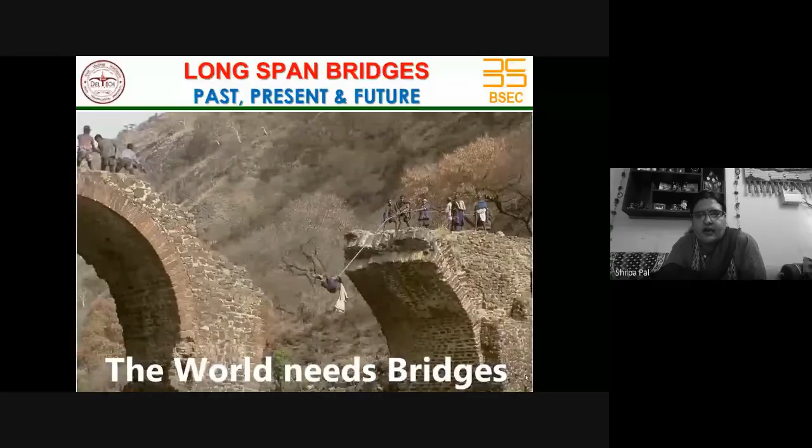So what I was mentioning is, bridges are amongst the most fascinating and at the same time the most challenging structural engineering work. And this is my profession as well as my passion.

A bridge, as I mentioned, is not just merely a crossing. They connect people, they connect communities, they reveal something about the creativity and ingenuity of the engineering fraternity.

If you see the early bridges, around the 13th century, we used to have bridges with non-metallic materials such as wire rope, vines, creepers, then stone and timber. The first suspension bridge, a long span bridge using cast iron chains, was built way back in 1620 in Tibet. The earliest version of cable bridges in modern times, using steel ropes, appeared about 150 years ago.

Bridges, as I mentioned, connect communities. What you see in this picture is basically school students crossing a stream by a bridge to reach the school. This is a reality in many parts of India and the world, and development stagnates if there is no bridge.

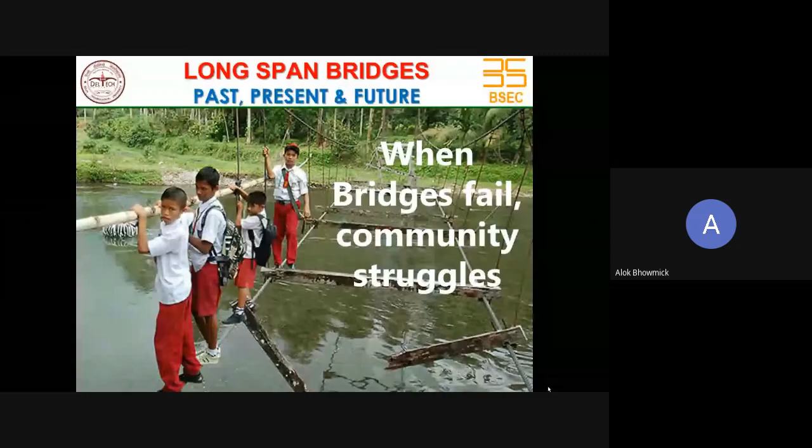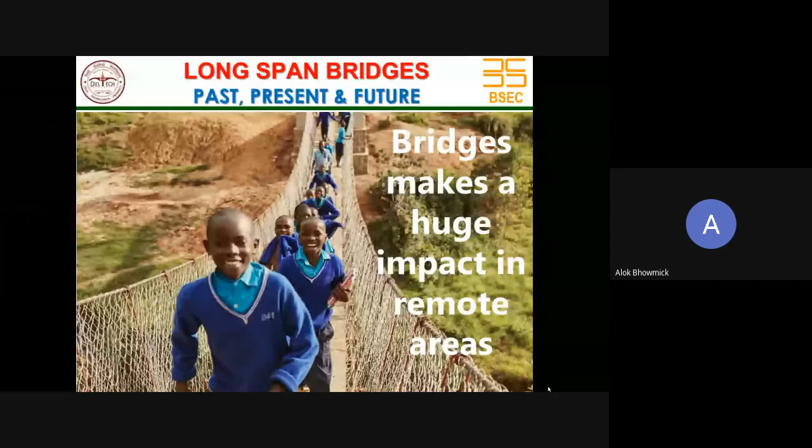What you see here is the smiling face of students crossing a bridge in Rwanda, called the Bridge to Prosperity. Interestingly, this bridge is built not by civil engineers but by the community itself, through community participation. Similar bridges are being built in remote areas, and they connect people and communities, becoming very much part and parcel of our human society.

Now, coming to my real presentation, which is on long span bridges: past, present, and future.

This is the broad content of my presentation. I will give a brief introduction followed by various types of long span bridges, along with the world record on span length. Then I will dwell upon cable supported bridges, which are the real long span bridges, followed by the conclusion. My presentation will last for about an hour, so kindly bear with me.

To start with the introduction, I will cover three important questions. First, what span length is considered long? When we talk about long span bridges, we must understand what is meant by long span, medium span, and short span. Second, what is so special about long span bridges, and why go for a long span bridge at all?

To answer the first question as to what span length is considered long, there is no clear-cut definition available. But broadly, based on the type of analysis we perform, we can say that short span is anywhere less than 100 meters. We would call it short span for the purpose of this presentation.

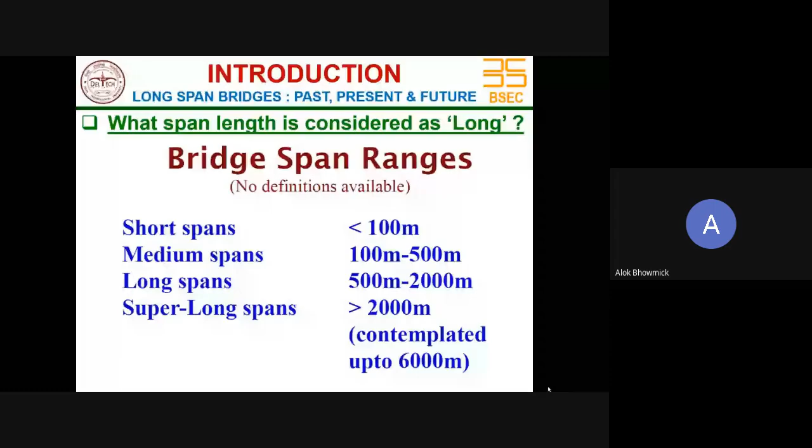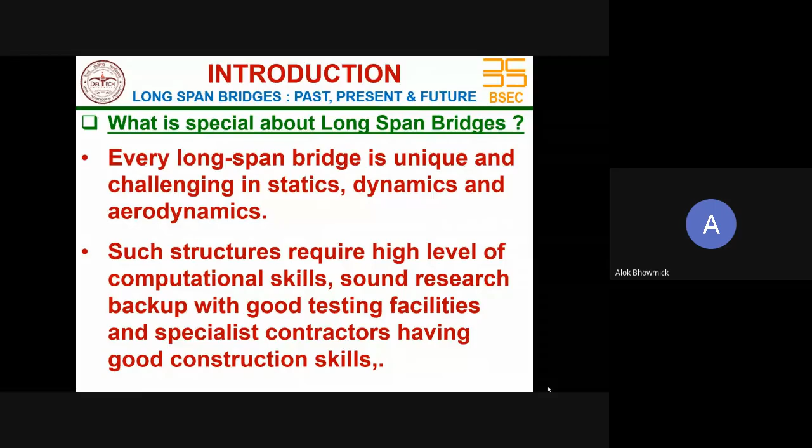What is special about long span bridges? Well, every long span bridge is unique and challenging in statics, in dynamics, and in aerodynamics. The treatment of each long span bridge would be different from the normal design philosophy and practice we follow for short and medium span bridges. Such structures require a very high level of computational skill, sound research backup with good testing facility, and specialist contractors having good construction skill to do this job.

Now the next question is why longer span? We require long span bridges at times to reduce the number of foundation units in a difficult area where foundation construction is difficult. As an example, we can have deep ravines or valleys, fast flowing rivers, hilly terrain where building foundations in deep gorges will be extremely difficult. Also, at times we require long spans in the stream for providing navigational clearances and to bring about greater overall economy and convenience.

As an example, if you can see, there is a hilly terrain and you can see these serpentine roads. Imagine a person staying on one side of the hill who wants to go to the other side for hospital or school. Imagine the kind of travel he has to do, even on a motor road - it would take hours to come down deep into the gorge and then go on top. So such a terrain would call for a bridge bridging the two hills, which would be a long span bridge.

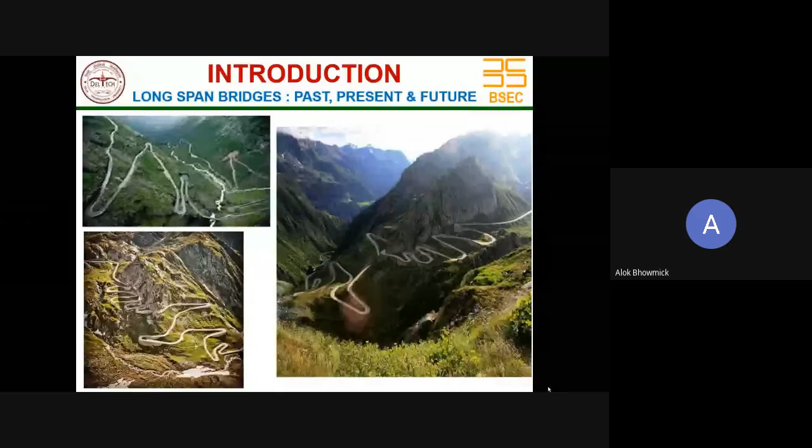An example of long span bridge connecting two hillocks, the slide at top shows Millau Viaduct, France, about 2.5 kilometer long, having multiple spans of 342 meter. This is a cable stayed bridge. As far as span length, it comes under medium as we defined, because anything less than 500 meter is medium. But this kind of long multiple span bridge would be covered under long span.

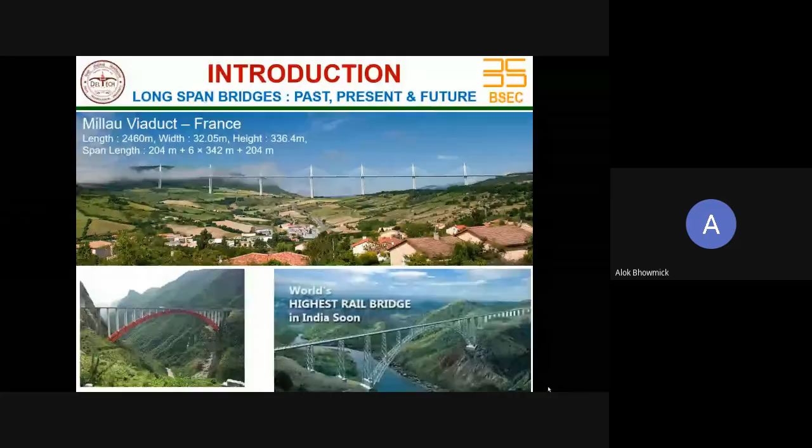There is no very clear cut definition of what is long span and short span, as I mentioned earlier. So this is one example where we have to connect two difficult terrains by means of a long span bridge. Another example, on the bottom right, is the world's highest rail bridge in India, which is under construction - a railway bridge in Jammu and Kashmir, spanning around 400 meter, coming very soon. It is under execution now.

What are the implications of using longer span? Well, there are many benefits and there are some disadvantages as well.

So if we go for longer span, we reduce the foundation construction, and in some situations this may lead to economy and feasibility. In many places it will be impossible to do foundations in the deep gorge, and therefore you have no option but to go for long spans.

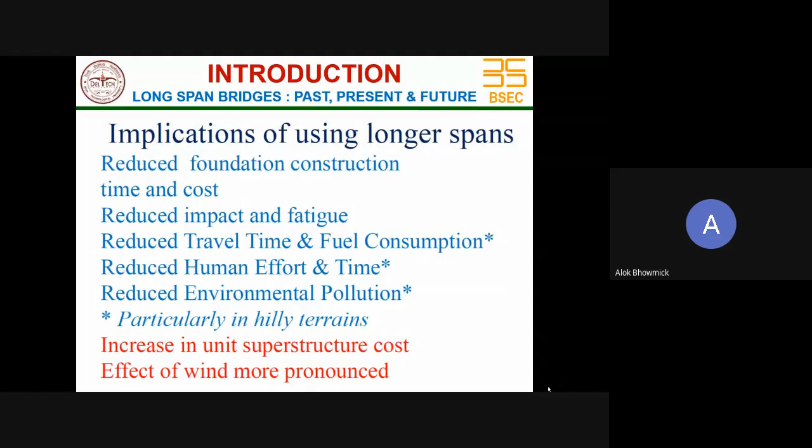Over the last 7 to 8 decades, India has made significant progress, and the world, of course, has also made significant progress in the art and science of long span bridges. I will explain in detail as we progress in the presentation as to where we stand in India as compared to the world in terms of span length.

Now, span length records are one of the indexes for measuring our advances or technological progress in bridges achieved over the years, and therefore it is important to do this. Although span length alone is not the only yardstick for measuring progress, we have made significant progress in many fields of bridge engineering, which may not be reflected truly if we simply compare the span length.

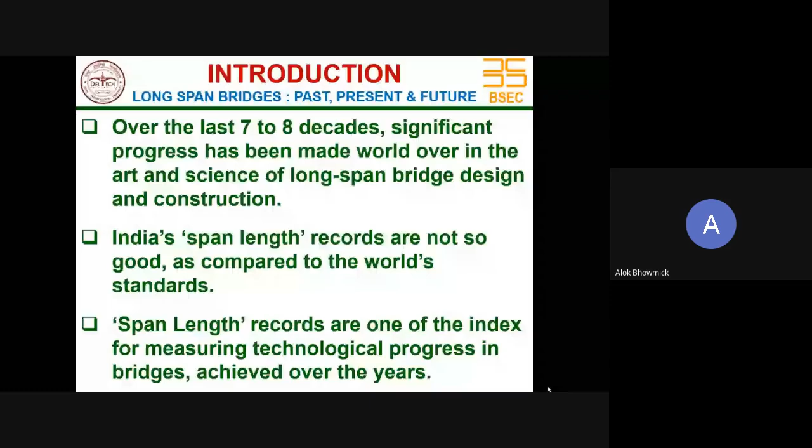Now, with this brief introduction, let me come to the second part of my presentation, which is types of long span bridges and record span length.

When it comes to long span bridges, we have the following categories: one is the girder bridge, second is the arch bridge, third is extradosed bridges, fourth cable stayed bridges, suspension bridges, and hybrid bridges. Let us understand what these stand for.

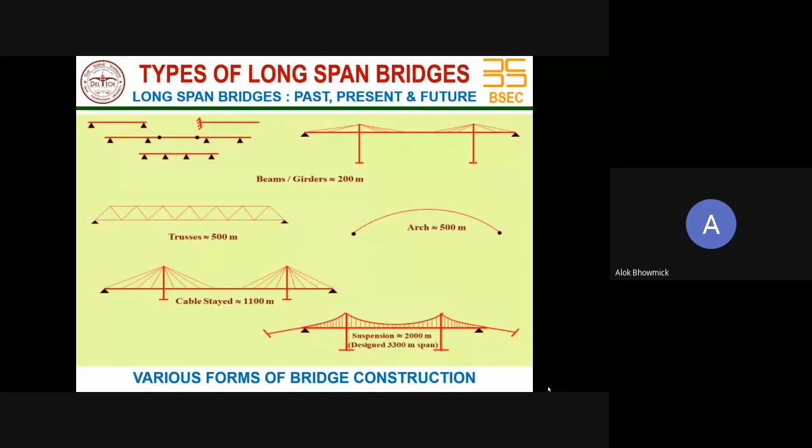So this is an example of girder bridges. You can see a number of examples just to show what girder bridges are. Many of you may not be aware of this, so I thought I would briefly tell you. You see these kinds of bridges routinely in urban areas or while crossing a river. These are girder bridges where the principal mode of transfer of load is through flexure, bending.

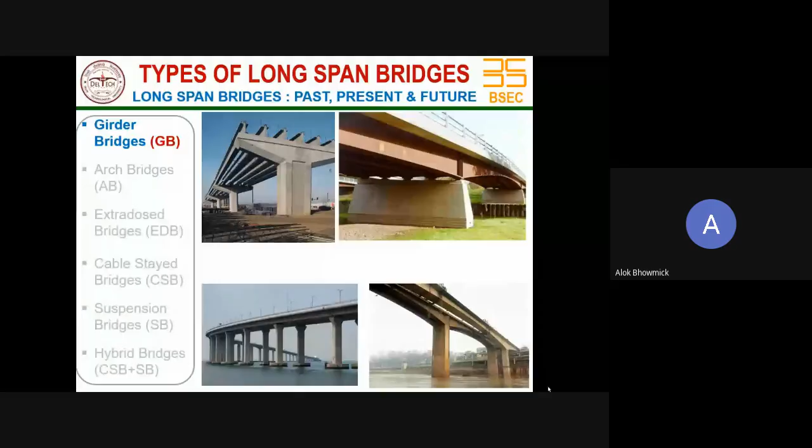The girder material in the case of the Shibanpo bridge, where the maximum span is 330 meters, is hybrid, and this is in China. One more interesting thing is that out of the top 10, 5 are in China. So China is dominating the girder bridges as far as technology is concerned.

So next is the arch bridges, and in the arch bridge category you can see various forms of arch bridges. I think in India we have a number of old arch bridges. I remember in Himachal Pradesh we have done 3 arch bridges in the Kulu and Manali area: Ramshila, Jia Barali, and they are in the span range of about 150 meters or so.

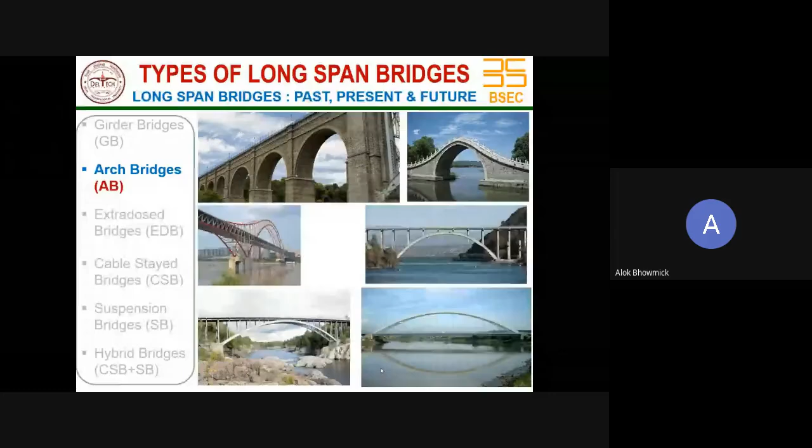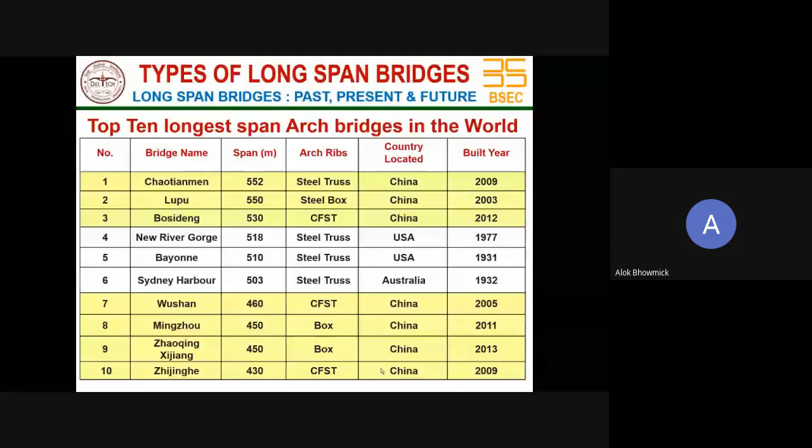If you see the list of the top 10 arch bridges in the world, the maximum span length is 552 meters, and in the top 10 the minimum is 430 meters. Again, in terms of arch bridges it is dominated by China, where 7 out of the top 10 bridges are basically in China. Material-wise, the longer the span, the trend is to go towards steel truss, or steel box, or concrete filled steel tubes. These are the 3 methodologies by which you can increase the span, reduce the dead load, and make it work.

In terms of extradosed bridges, what is an extradosed bridge and what is a cable stayed bridge, I think we will talk about a little later. But suffice it to say that extradosed bridges are also cable supported bridges, where the mode of load transfer is partly through flexure and partly through tension through cables. So it is a mixture, bridging between a girder bridge and a cable stayed bridge. In a cable stayed bridge, the principal mode of load transfer is through cables, which is tension. In extradosed bridges it is intermediate: the girder has rigidity, so part of the load is transferred through flexure of the girder, and part through the cables by tension.

India has done exceedingly well in extradosed bridges in recent times. In the last 2 years, India has, by the way, the longest bridge length of extradosed bridges in the world, in Bihar, and we are matching the world in terms of quality, span length, and technology as far as extradosed bridges are concerned.

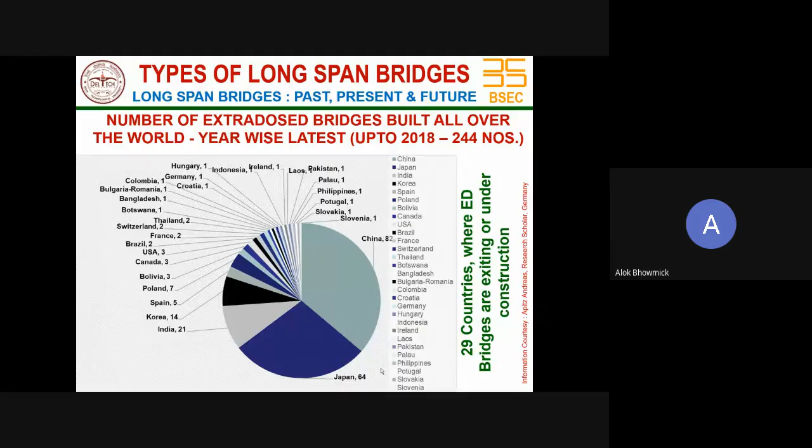Till last year, up to 2018, I had information that about 250 bridges, precisely 244 in 2018, had been constructed. Now more than 250 bridges all over the world have been constructed. These extradosed forms of bridges are relatively of recent origin, unlike suspension bridges, arch bridges, and cable stayed bridges, which have been in practice for more than 2 centuries.

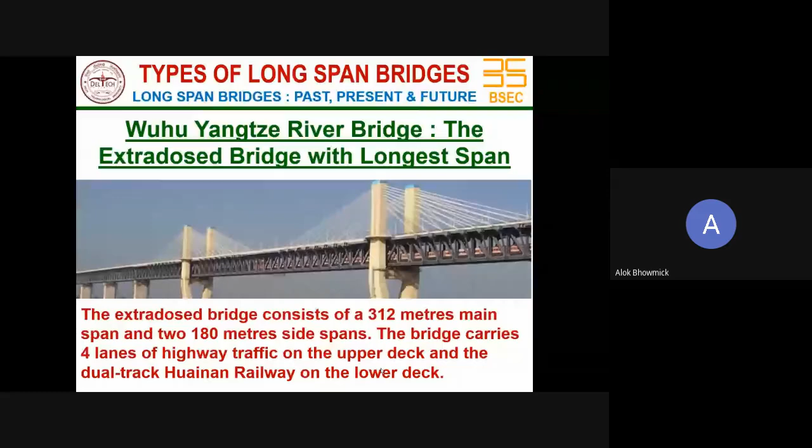The principal mode of load transfer is tension through the cable. You can see that the deck is so flexible and thin that it doesn't have any carrying capacity of the load. Whatever load comes from the live load gets transferred to the cable, and the cable transfers it to the pylon, and from the pylon it goes to the foundation. That's the mechanism.

This is a bridge I want to spend a little time about. It is one of the most pleasing cable supported bridges which was conceived but never constructed. This bridge was designed by T.Y. Lin to cross the middle fork of the American River, about 10 miles upstream of the planned dam. There was a design competition, and T.Y. Lin won it for the best design.

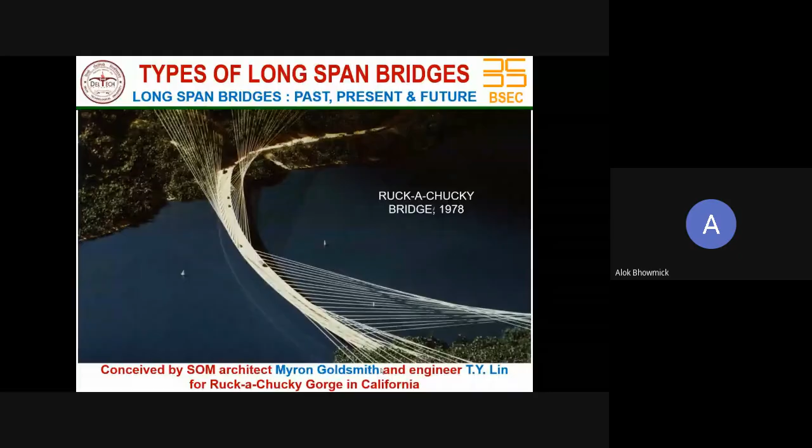If I look at the 10 longest span cable stayed bridges in the world, as mentioned, Russky Bridge at 1104 meters is the maximum span, and most of these bridges are in China—6 out of these 10 are in China. Another thing is that as the span goes longer and longer, the deck becomes orthotropic steel, OSD meaning orthotropic steel deck. As the span gets longer, you have to reduce the dead load, so slowly you convert from concrete to steel as you increase the span. So most long span bridges have a steel deck, and most steel is optimally used in long span bridges.

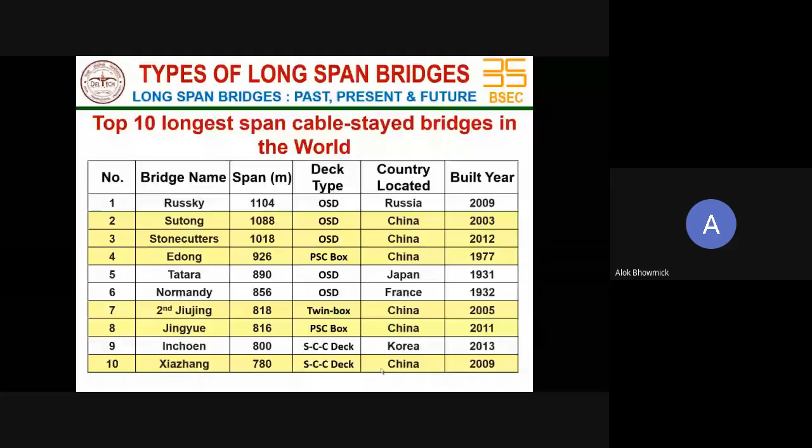Coming to the suspension bridges category, we have the Akashi Kaikyo Bridge in Japan, about 2 kilometers long. Suspension bridges and cable stayed bridges are those where the spans can be increased further. Presently we are at 1100 meters for cable stayed bridges and 2 kilometers for suspension bridges. But very soon, in another 5 years, you will see bridges with span length more than 3.3 kilometers long, coming up in Italy.

If we look at the top 10 longest span suspension bridges, Akashi Kaikyo is on top at 1991 meters, which is nearly 2 kilometers, and it's a trussed bridge with a truss type deck. Again here you see China's dominance on suspension bridges. So in a nutshell, when it comes to long span bridges, China has dominated in all forms. I think credit goes to their very strong research units and also their construction—they have developed widely in construction technology as well. Over the last 10-20 years, this development has taken place there.

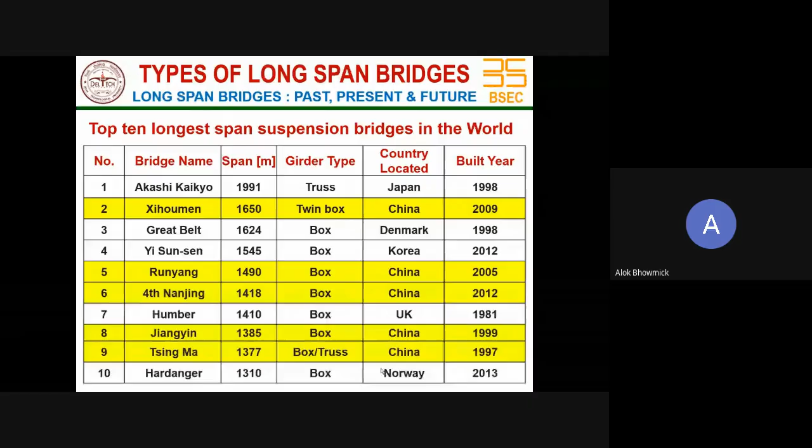Now coming to hybrid bridges—what are hybrid bridges? A hybrid bridge is a combination of cable stayed and suspension bridges, meaning you have cables in the shape of a cable stayed bridge as well as the shape of a suspension bridge. A fine example of a hybrid bridge is the Brooklyn Bridge, constructed way back in 1883 in New York, an iconic bridge you can't miss if you visit as a tourist. The one of recent origin is the Yavuz Sultan Selim Bridge, popularly known as the Third Bosphorus Bridge in Turkey, about 1.4 kilometers long, and it is a hybrid form.

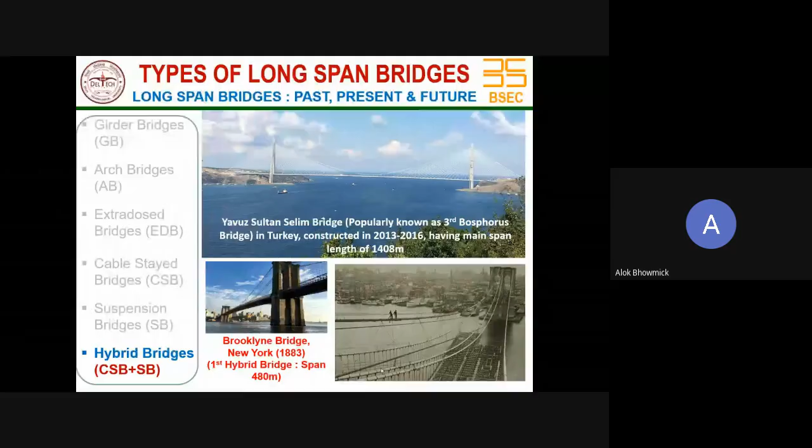So with this brief about the various types of long span bridges, we come to the next part of our presentation, which is cable supported bridges, development and prospects in India.

We discussed about, we have seen this slide earlier, and in this we have discussed about all forms of long span bridges, but now let us focus more on these three systems, which is cable supported bridges, that is cable stayed, suspension and the extradosed bridges.

In fact, out of these, let me focus only on the cable stayed bridge and the suspension bridges, because extradosed bridge also has a limitation. It can be built only up to about 300 meters, that is an extreme limit which China has succeeded in. But otherwise, generally, it will become economical for an extradosed form only when the spans are maximum up to 250 meters or so. Beyond 250 meters, you have no option but to go for either a cable stayed bridge or a suspension bridge, or you can go for arch bridges, steel arch bridges, which I have shown.

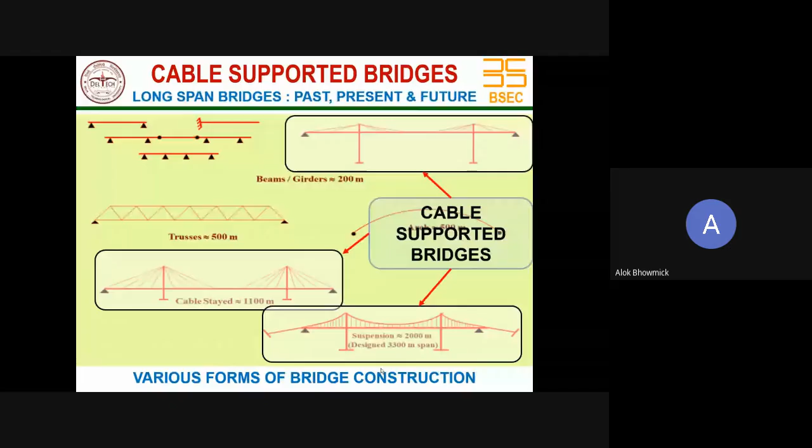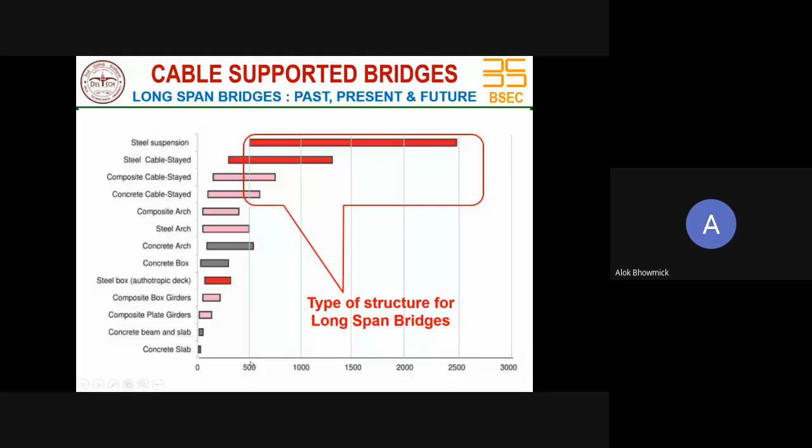So if you see this slide, it tells you in the long span bridge category, what is the bridge form which is most suitable. And you can see that beyond 500 meter, you only have the steel suspension bridges or steel cable stayed bridge or composite cable stayed bridge and concrete cable stayed bridge. In all other categories of type of bridges, they are suitable below 500 meters, and between 300 to 500, of course, there are many forms which are possible.

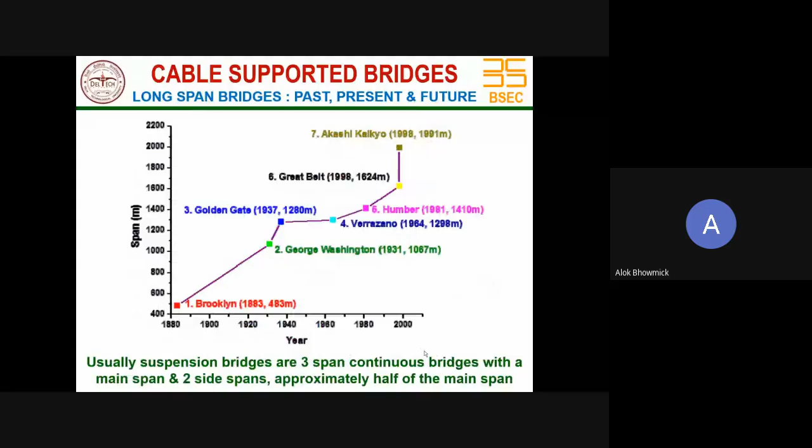Similarly, in terms of cable stayed bridges, suspension bridges, this is how we progressed. Brooklyn Bridge was constructed in 1883, 483 meter span, but today we are at 1991 Akashi Kaikyo, and Messina Strait will be somewhere 3,300 meters, which will be way above, when it is completed, of course.

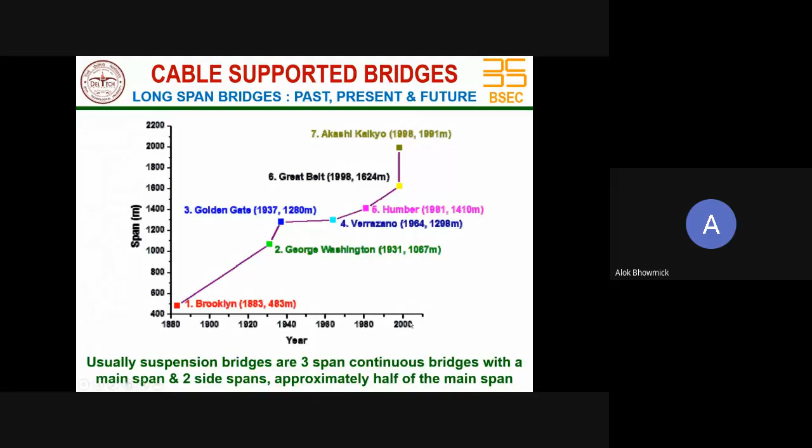In the case of a cable stayed bridge, the structural behavior is different, where the deck is supported by a series of cables connected to a pylon, and then the deck is suspended by these cables. Each and every cable is a primary member. There is no secondary element here.

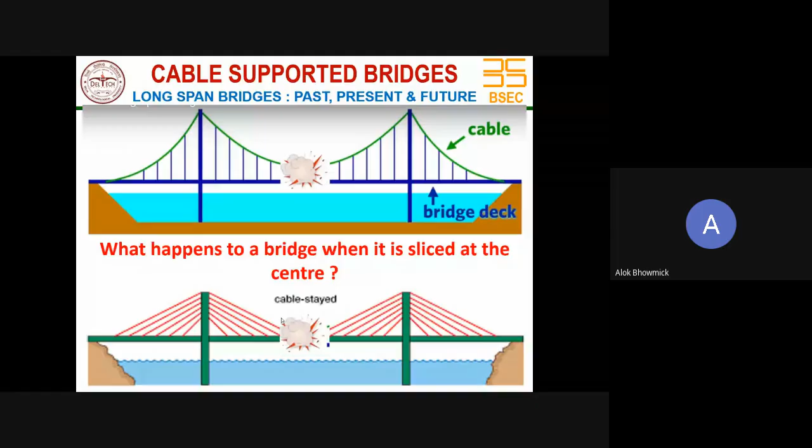Just to give you a better understanding, if you blow up the suspension bridge at the middle, if this cable is cut, if a terrorist wants to destroy a bridge, he has to cut this one cable, that's good enough, because that would result in the failure of the bridge. But in a cable stayed bridge, breaking one cable would not lead to a global failure, because the bridges of this form are nowadays generally designed for a situation where one cable can get snapped. So just breaking one cable will not mean a complete failure of the bridge.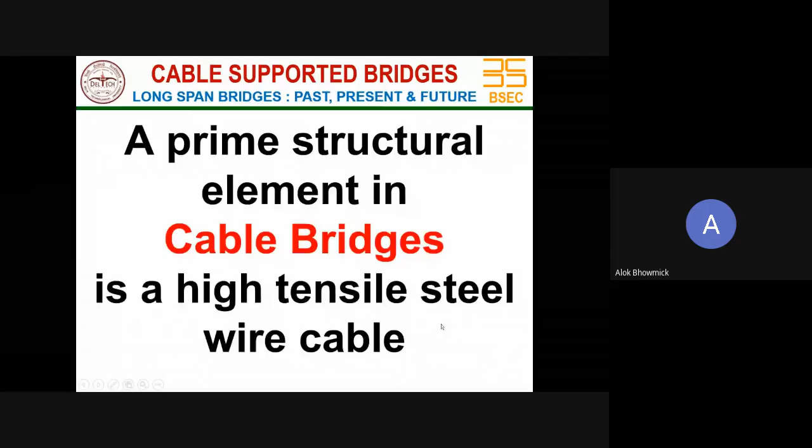So now let us understand that in any cable supported bridge, the prime structural element is the high tensile steel wire cable. These are the various forms of cross section of the cable, whether it is a cable stayed bridge or a suspension bridge. These are the primary element, and the entire technology revolves around how to reduce the dead weight of this primary tension element and how to maximize the unit force on this cable.

We can see now how we have progressed over the years on the cable technology. Just to give you an actual picture of the various types of cables that we use: this is called parallel wire cable, which is used in Golden Gate Bridge. We have parallel strand cables, steel wire ropes, locked coil strands. All these are different forms which are used, and they have their own applications.

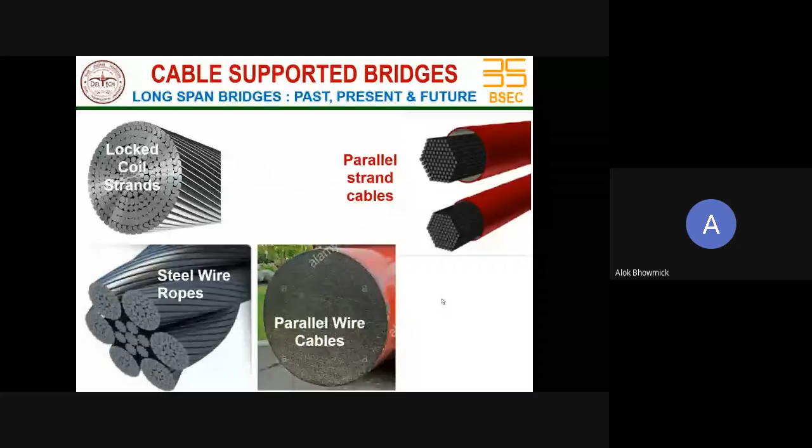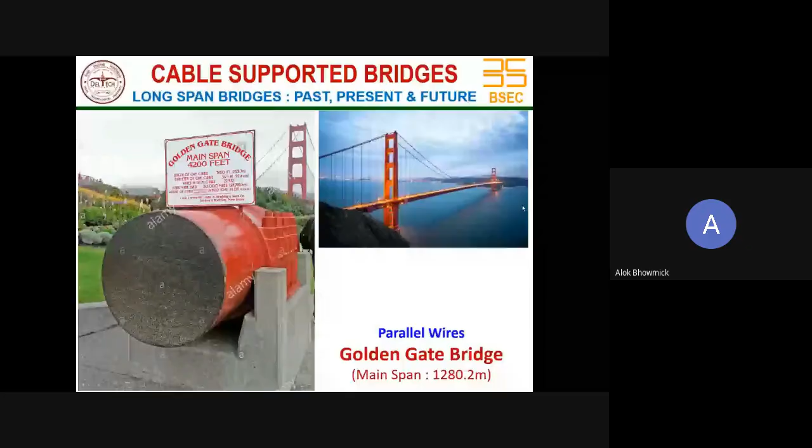I would not like to go into details of those applications in this presentation, because we will lose focus. If any of you have visited California, San Francisco, and visited the Golden Gate Bridge, there is a museum on the side where you can see a picture of a section of this cable. This is a parallel wire span. The main span is about 1280 meters, and this shows the cross section of the cable.

How have cable bridges evolved from the primitive days? Let us understand this. In primitive times, we have what you call living root bridges. They still exist in Meghalaya, and this is the primitive cable supported bridge where tree roots are being used to connect. Very interestingly, these bridges still exist in Meghalaya today.

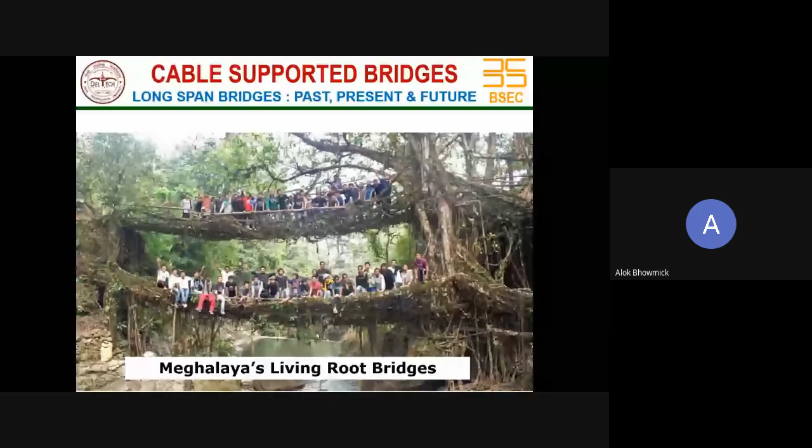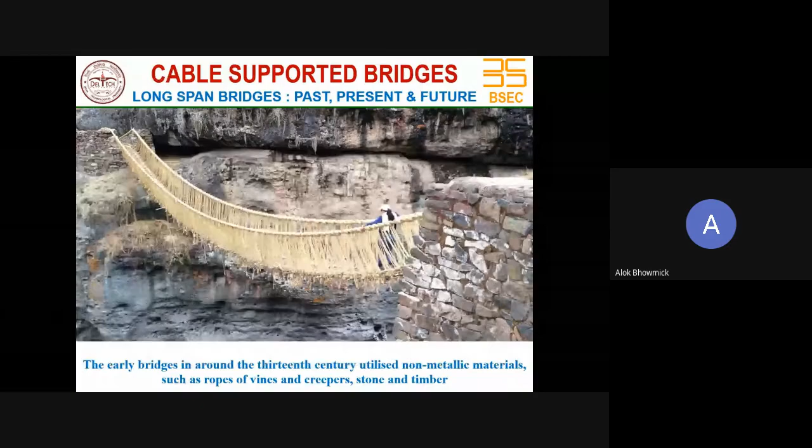Another example of Meghalaya's living root bridges. The early bridges around the 13th century utilized, as I mentioned earlier, non-metallic material like ropes of vines, creepers, stones, and timbers.

Why do you go for cables in terms of long span bridges? I mentioned this earlier; let me explain in little greater detail. These tension structures are essentially utilized in longer spans where other systems would not compete, as I mentioned.

It may be noted that in a flexural system, you have this stress strain curve. The capacity of the section is derived by its capacity to follow this stress strain. You have compression - if it is a simply supported structure, you will have compression at top, tension at bottom, and whether you go for reinforced concrete, pre-stressed concrete, or steel, you have to ensure stresses are within limits. In this scenario, stresses are maximum only at the extreme fiber, and we are not utilizing the material to its full capacity, because the strain and stresses reduce from the extreme fiber. So there is a limitation in optimum utilization when you talk about beam flexure.

Now take the case of a cable. The cable is in tension, and you can see at any cross section, whenever there is a transverse load, the cable is fully stressed. All the fibers have the same uniform stress, and therefore, if it has the capacity, it can take the load optimally.

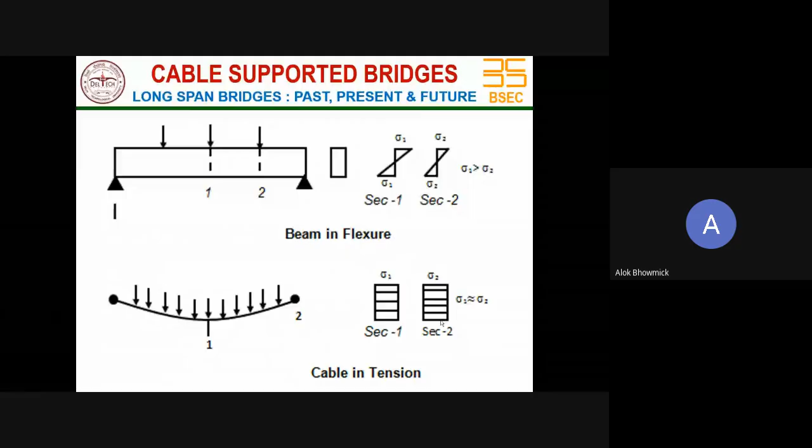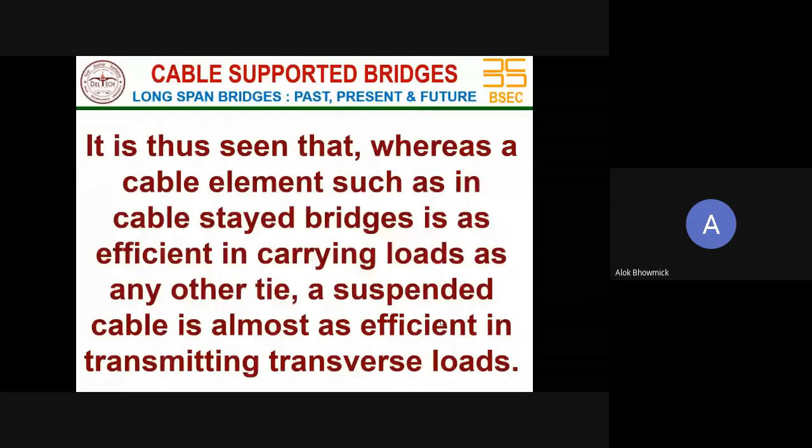A cable element in a cable stayed bridge is as efficient in carrying loads as any other tie. A suspended cable is almost as efficient in transmitting transverse load also - I will discuss this in a little detail now. Furthermore, a cable element, being a purely tension member, is more efficient than a comparable compression element such as an arch, which is encumbered with possible instabilities.

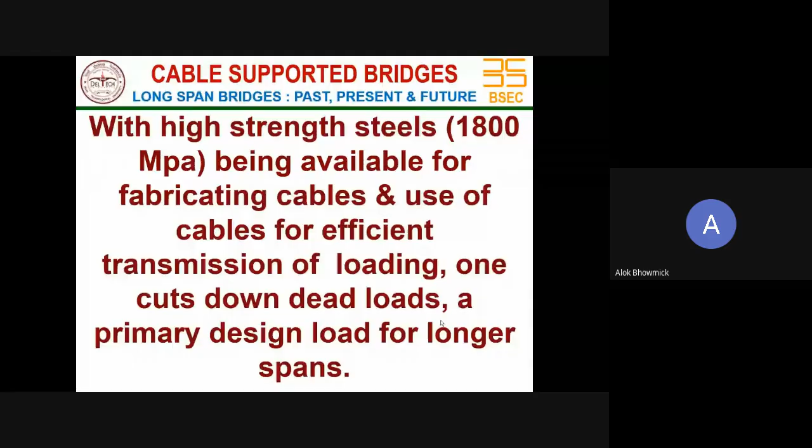So therefore, one of the prime reasons we can increase span lengths beyond what we have achieved is by increasing the strength of steel, or unit stress in the cable, because in a long span bridge, the primary load is the dead load. Live load is only a small fraction of the total load. So if we want to optimize, we have to reduce the dead load, and one way of reducing the dead load is by increasing its strength.

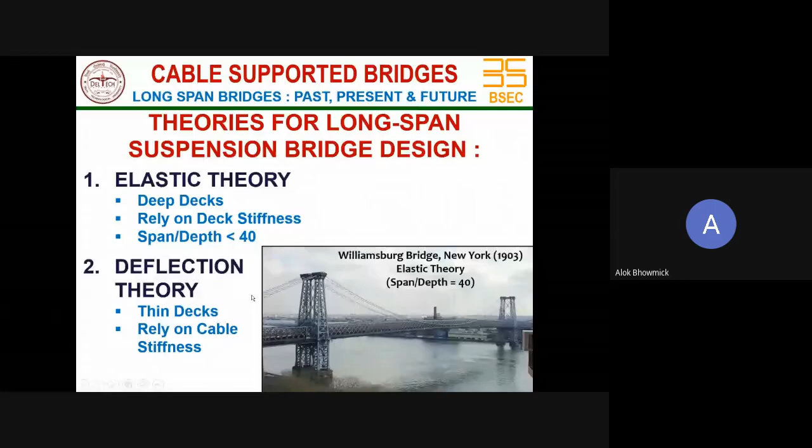In hindsight, one could say that the bridges went overboard - the designer went overboard in providing the stiffness of the girders, while additionally using cable stays also. So a lot of margins because of uncertainties.

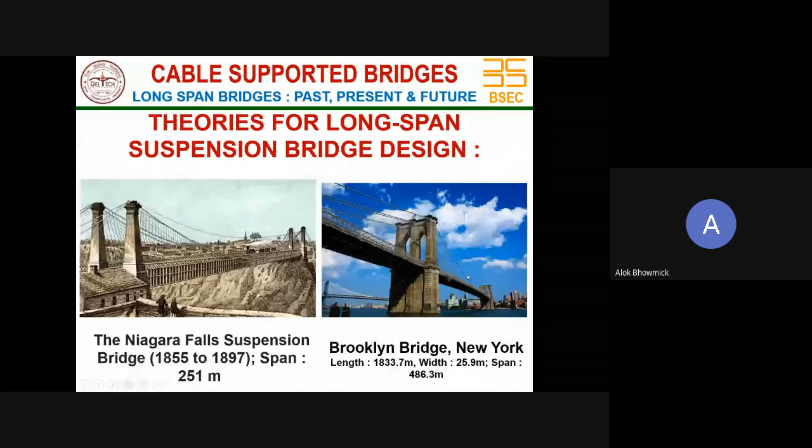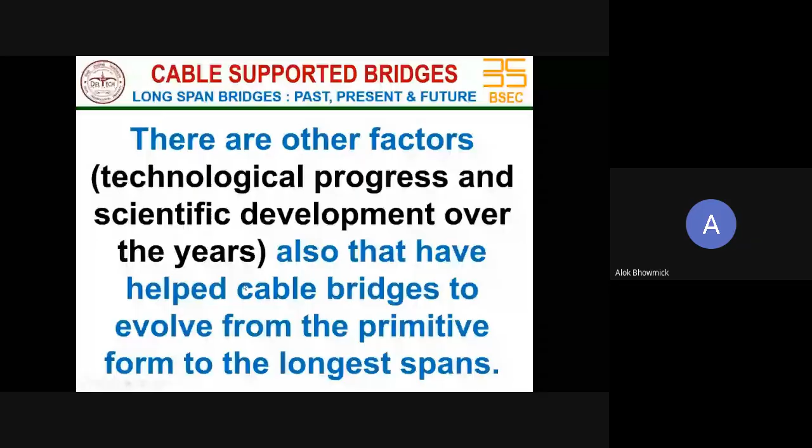This bridge collapsed in 1940, and I don't know whether I'd like to show you a small video. Let me see. Okay, I think the video is not working. Let me try again. Yeah, so let me show a video of this.

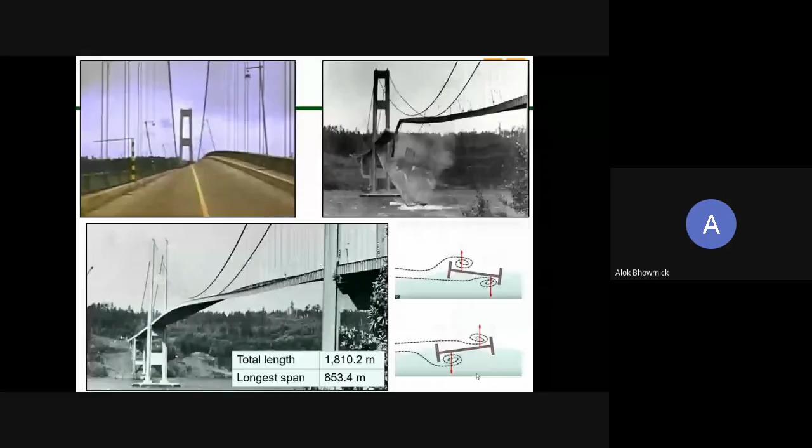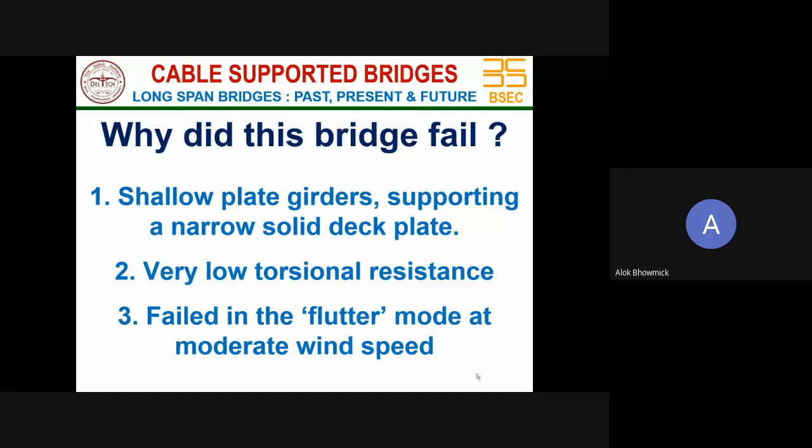This collapse of the Tacoma Bridge enlightened all civil engineers designing suspension and cable supported bridges in that period, leading to many lessons. Subsequently many theories on wind behavior of long span bridges were decided on the basis of this collapse. Why did this bridge fail? It failed because of shallow plate girders supporting a narrow solid deck plate, very low torsional resistance, and it failed in the flutter mode at moderate wind speed - mainly due to the lack of understanding of wind load.

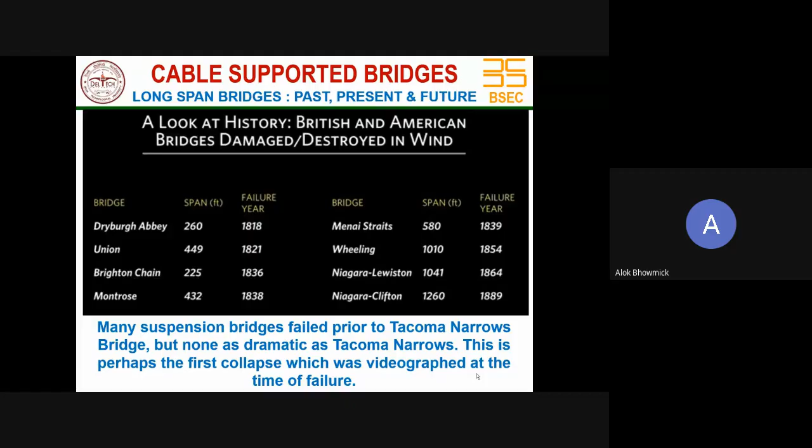A far better understanding of bridge aerodynamics followed the efforts after the dramatic Tacoma Narrows Bridge disaster - instead of using plate girders, engineers began using box or split box girders, and surface features for long cable stayed bridges. These are the lessons learned. Incidentally, there were many failures before Tacoma Narrows and many afterwards also, but nothing was as dramatic, because this collapse was actually captured on video, leading to very good understanding of the behavior.

These are some of the concerns of wind behavior: flutter, vortex shedding, and buffeting. All these things were studied deeply later, and we extended the span lengths. In fact, subsequent to the Tacoma Narrows Bridge collapse, many of the suspension bridges existing at that time were strengthened because of the better understanding of wind.

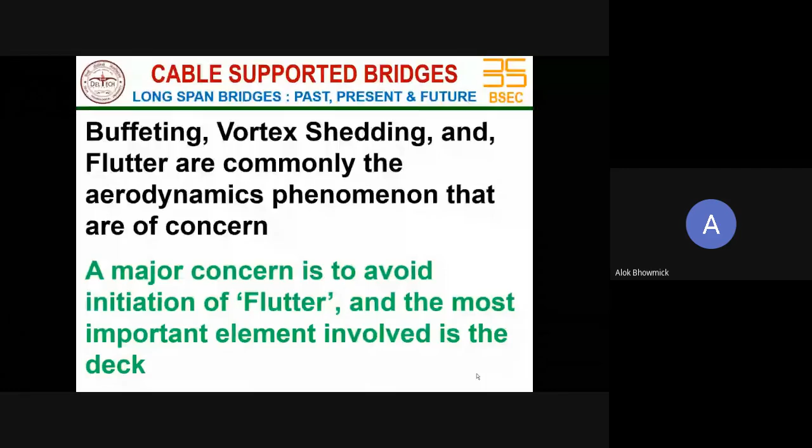Now let us come to the individual elements of the cable supported bridges and understand the behavior. The deck is the most important component of the bridge from the standpoint of aerodynamic behavior. You can see that the shape of the deck cross section can have a profound impact.

The trusses, as you see on the top slide, this is a truss bridge and this is a box. These are the two types. Modern suspension bridges are all with box because the aerodynamic behavior is far better. The earlier ones are made of trusses, and there is a significant difference in the behavior on wind. The truss attracts large drag compared to the streamlined boxes.

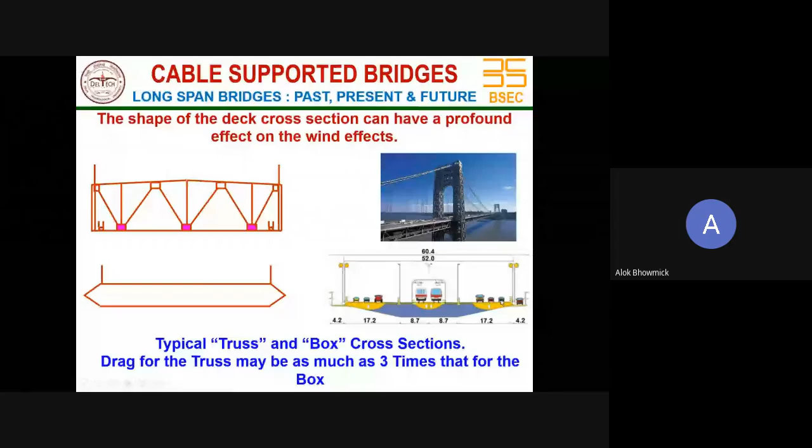The cross section here you can see is that of the Messina Bridge in Italy, which is under construction. You can see the drag coefficient for different shapes.

Let me tell you that when the span length is increasing, as we go for longer spans, all other loads are secondary. The wind becomes the dominating force. General conception amongst engineers is that earthquake is a very dominating force for long spans or tall buildings. It is not so. Earthquake takes a second position. Wind becomes dominating, and a better understanding of wind, good wind tunnel testing, becomes necessary when the span length increases. You can see how the shape of the elements are so important while fixing the long span so that you can reduce the wind forces.

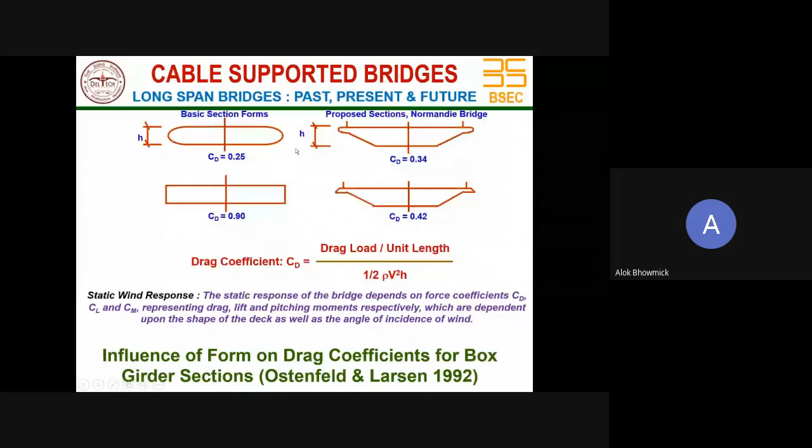So this split box is what you see here, the cross section of Messina Bridge, and a single box is not good from wind consideration. So it is a split box. There are 3 boxes with a transversal beam, and this is the form.

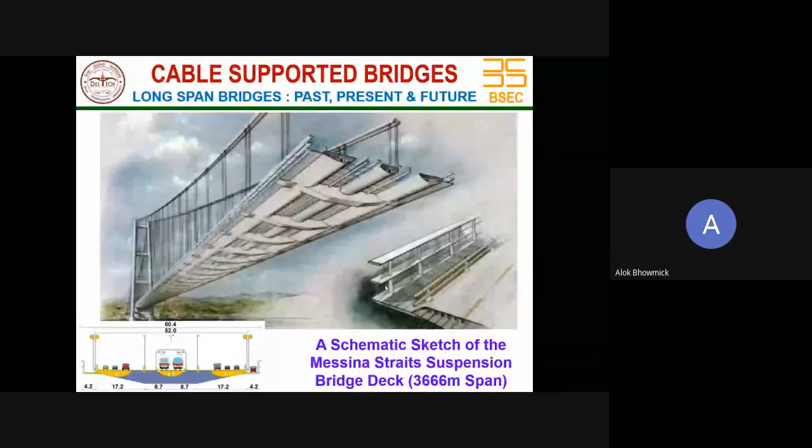I can show you another isometric view of this bridge, a schematic sketch of Messina Straits. The main span length is 3,666 meters, and you can see not only the deck has got streamlined aerodynamic features, even the railings are having aerodynamic features. This is the level of detail that you have to go to if you go for a cable stayed bridge or suspension bridges of long spans.

Let us come to the cables. Cables are employed in suspension bridges as main cable and hangers, and in cable stayed bridges as stays. As I mentioned earlier, in case of suspension bridges, this is the main cable and this is the secondary cable, the hangers. In a long span, they often experience singing due to vibrations.

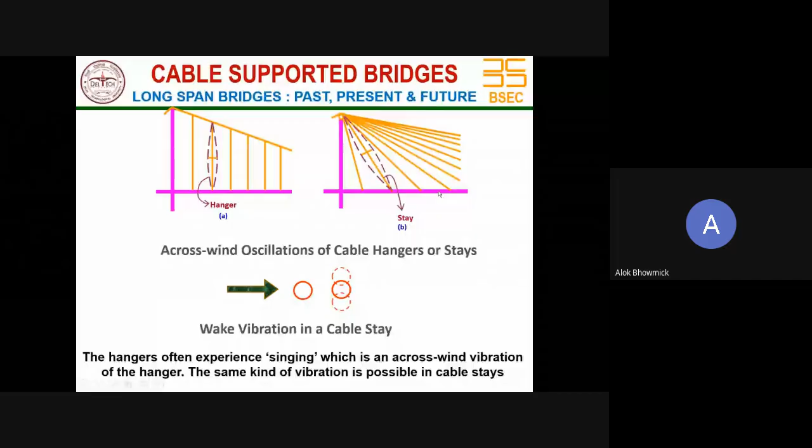Even in case of cable stayed bridges, there is sometimes singing of the cables in very long spans, where this cable itself may be about 300 to 400 meters in length. There are ways and means by which these vibrations can be controlled. As stays become longer, the problem of rain-wind induced vibration becomes a possibility.

Hangers and stays may often be provided in pairs. In such cases, wake induced across-wind oscillations may also occur. So what are the various ways by which you can reduce that?

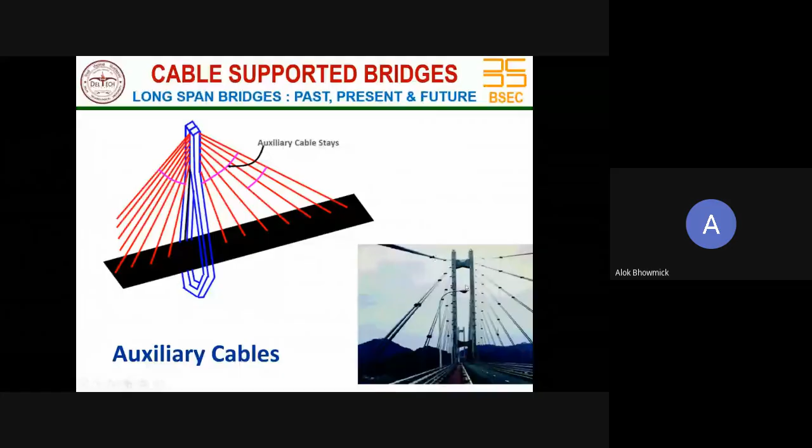You can provide auxiliary cables. You can see how these auxiliary cables are placed to reduce the vibration. You can also use damping devices. You can see how the damping devices are placed here to increase the damping of the cable vibration.

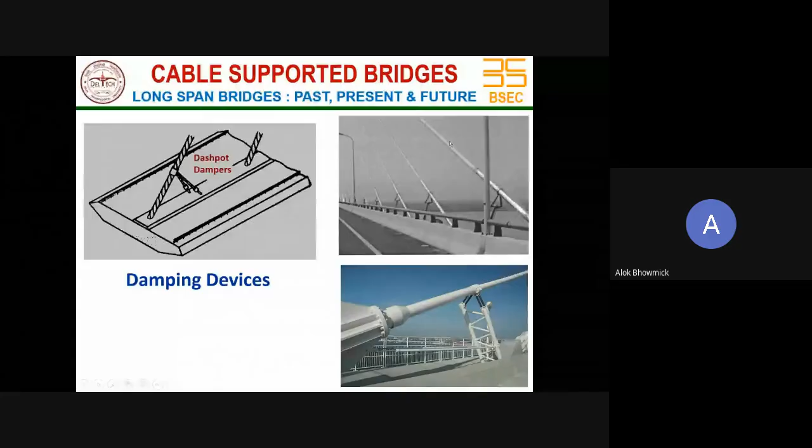Also, you can have possible surface features in the stay cables to reduce the rain-induced vibrations and the wind-induced vibrations. There are several ways by which it can be done, and there is a lot of research going on. In practice, these are live examples from the bridge. You can see these dampers are placed in the cable to reduce the vibration impact.

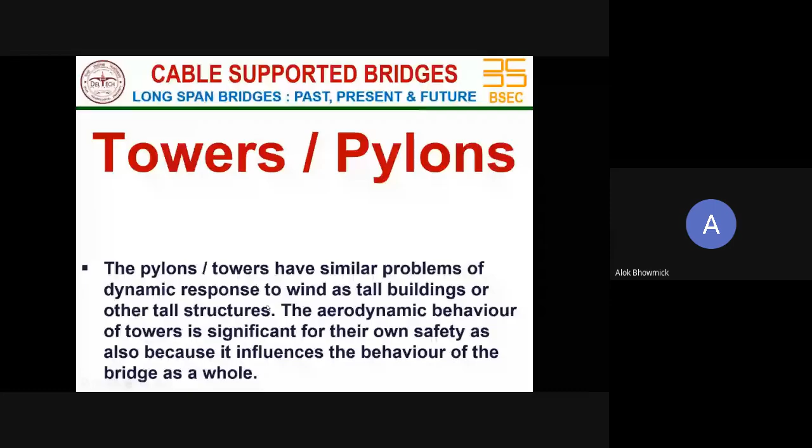Coming to the towers, the pylons and towers have similar problems of dynamic response to wind as tall buildings, and the aerodynamic behavior is significant for their own safety. You can see, in a rectangular tower, you do a wind tunnel test and you try to use many features to reduce the impact.

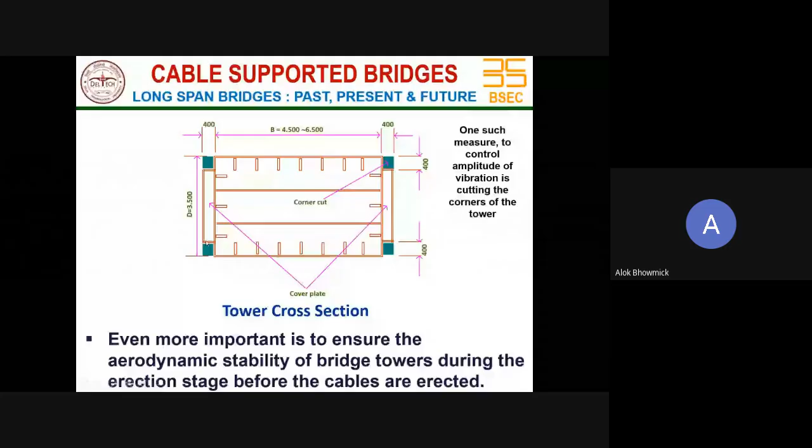In one such case, the shape is changed. Instead of a rectangle, the shape is changed so that there are 4 cuts here, and these cuts have helped to reduce the across-wind vibrations.

Now, wind investigations are very common when you go for longer span bridges. Without wind investigations, you cannot proceed, as the normal statical method of wind that we do for short and medium span bridges no longer applies to long span bridges. You have to do dynamic understanding of the bridge.

Its topography is very important, so you conduct wind tunnel tests. These investigations can be carried out physically by full model tests or by computational fluid dynamic methods.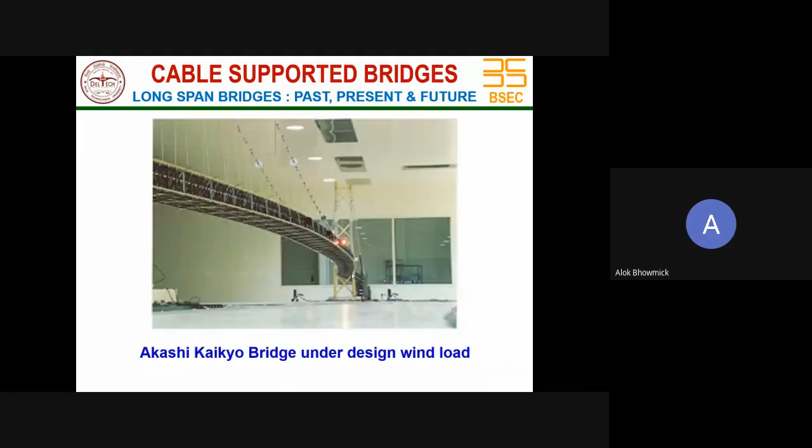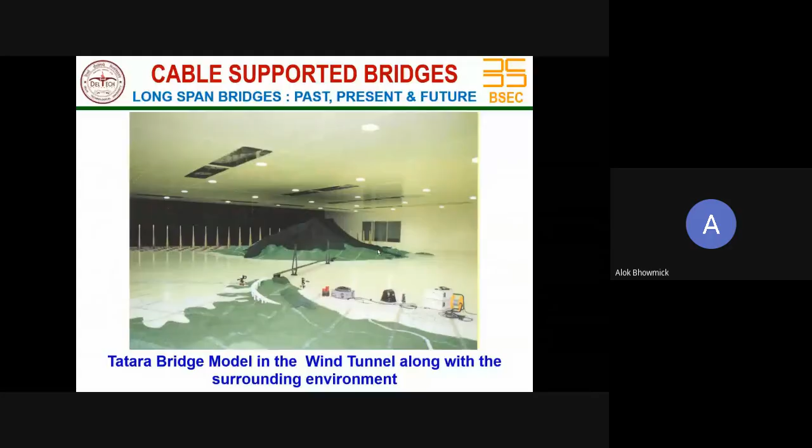You can see another example of a Tatara bridge model, and in this wind tunnel model you can see not only the bridge but also the surrounding hillocks on both sides. Everything is modeled because topography plays an important role in wind behavior, and all these features are captured in the wind tunnel test if need be. This is how wind forces are finalized in designing suspension bridges or cable-stayed bridges.

Investigation through the construction stage is equally important. Other factors include far superior computing tools to support the analytical efforts needed for these complex structures, vast improvements in cable technology including its protection measures, and great changes in construction technology.

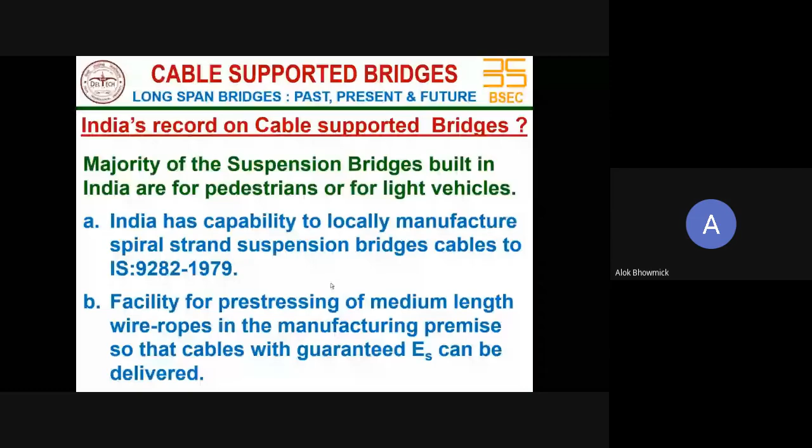Now, India's record on cable-supported bridges. The majority of suspension bridges built in India are for pedestrians or light vehicles. India has the capability to locally manufacture spiral strands for suspension bridges conforming to IS 9282, with facility for pre-stressing medium-length wire ropes in the manufacturing premises so that cables with a guarantee of E value can be delivered. We have that capability, and facility for wind tunnel testing is also available simultaneously.

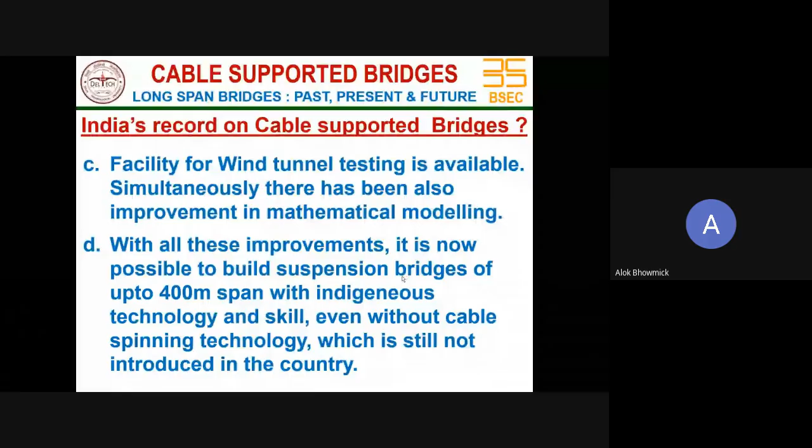There has also been improvement in mathematical modeling. With all these improvements, I feel it is now possible to build suspension bridges in the range of 400 to 500 meters with indigenous technology and skill, even though we do not yet have cable spinning technology.

Now, with this, I come to the end of my presentation. Let me conclude by saying that in this presentation I have attempted to give you an idea about long span bridges, their structure types, and span range. I tried to trace the path of development of cable bridges from primitive times, and it is seen how, based on tremendous growth in computing techniques, material strength and quality, and construction technology, magnificent and imposing bridges of great aesthetic appeal can be built.

It is clear that the Indian industry is not yet technologically geared to fully exploit the benefits of long span bridges. Complete elimination of this long span family of bridges surely signifies a loss of technological parity with the world. Considering the large-scale infrastructure development taking place in India, it is high time that industry recognizes the need for building such long-span bridges for sustainable growth.

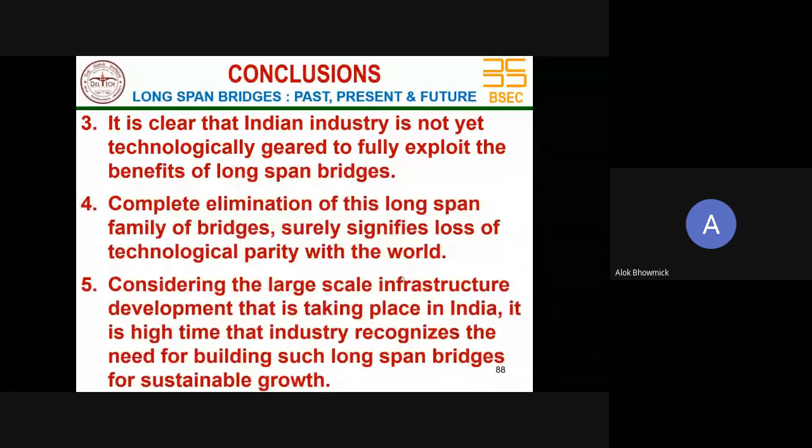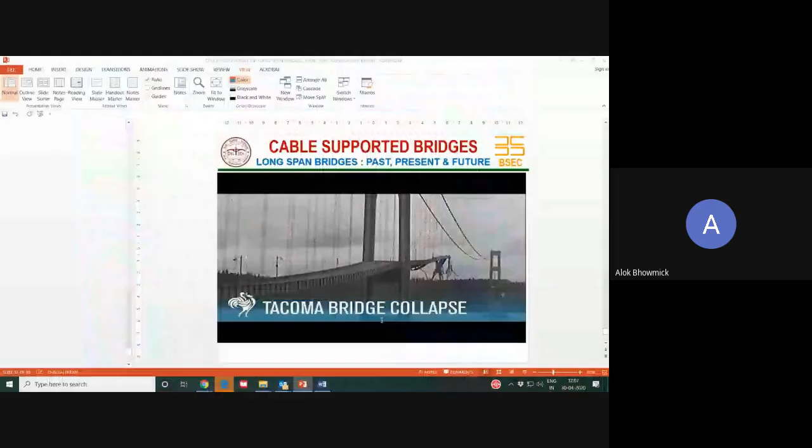Hello. Hello, yes sir, thank you sir for your lecture. I request from the audience if there are certain questions. Hello, so now sir, can we take a few questions? Yeah, if anybody wants to ask something, please unmute your mic, and one by one we can have the queries. Hello. Hello, am I audible? Yes.

Sir, good afternoon, my name is Prashant. I wanted to ask, if at a bridge site there is no technical problem in constructing the foundation, what should be more economical—either to create a new foundation or to increase the span?

You see, you have to do a techno-economic feasibility study. The normal way of deciding the structural scheme and type of bridge is by carrying out a techno-economic feasibility study where you work out various options and do an analysis considering cost, time, construction technology, everything, and then take the decision.

Okay, so that should be based on a feasibility report, sir. Yeah, yeah, you have to first perform a feasibility study where you do an option study of various possible options and then choose the best one. The decision matrix may consider sustainability, economy, and time of construction—there are many parameters that need to be considered for taking the decision. Great, thank you sir, thanks for the presentation.